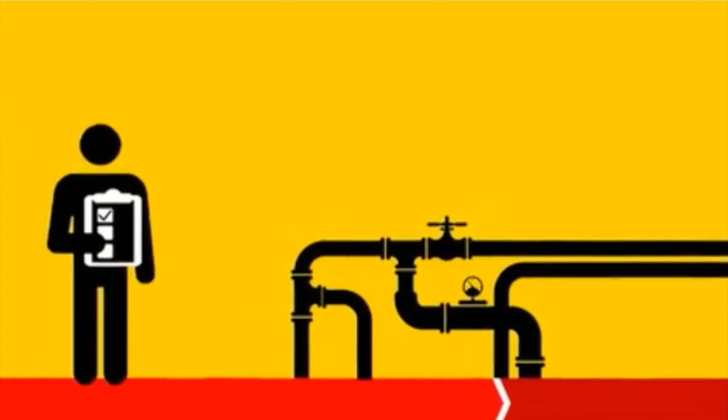Most people think process safety is about following a process, like rules and procedures to keep you safe. That's a part of it, but not all of it. So what is process safety? Process safety is about using special precautions to keep our facilities safe and our products in the pipes. In the process safety world, we call these special precautions barriers.

We interface with barriers every day as we work to keep our people safe. Let's take driving, for example. Think about rumble strips that have been designed into the roadway to help you keep your car in the lane, seat belts to keep you secured in the car, and vehicle maintenance to keep things running smoothly. These are all barriers working together to keep you safe on the road.

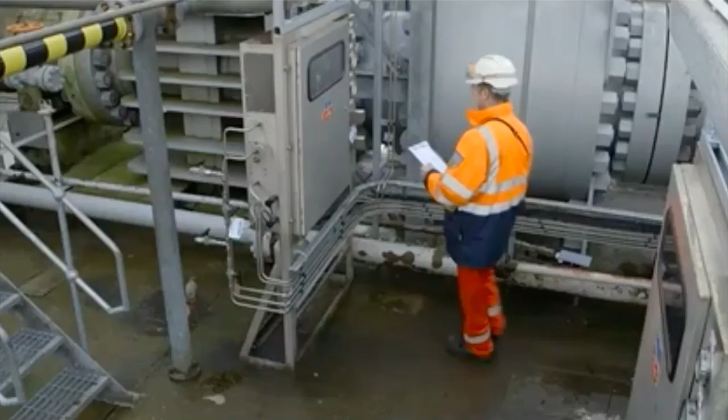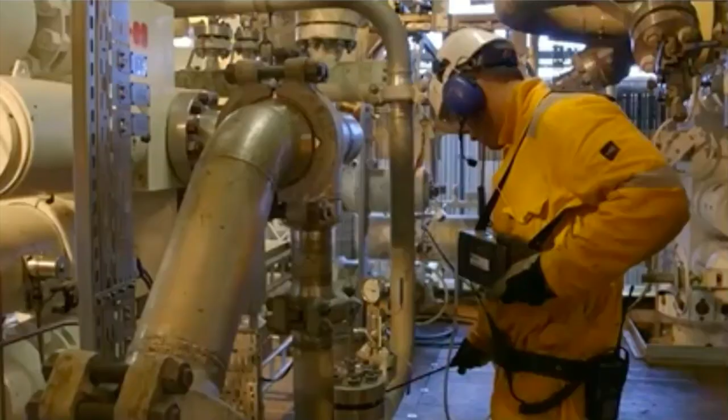We also use barriers in the process safety world to help protect people and the environment. These barriers can be equipment, people, or process related, and the bigger the potential hazard, the more barriers we put in place. In our operations, we're working with hydrocarbons, which can present serious risks. Our job is to ensure that we not only have a good number of barriers in place, but also that they are as effective as possible.

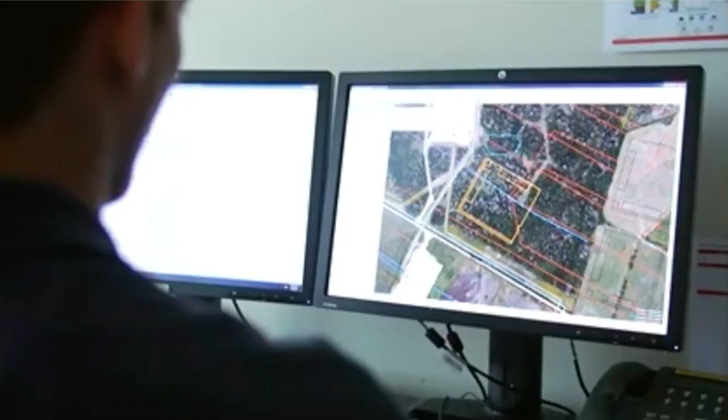We're doing our part to strengthen these barriers. Engineers are designing safer systems. Our operations personnel are effectively performing maintenance. Supervisors are stressing the importance of following procedures. And process safety experts are analyzing events and making sure that we learn from near misses. It's all about making our barriers as strong as possible.

So what can you do to strengthen the barriers that you control? Talk to your supervisor or join the Global Process Safety Excellence NOE and help us keep it in the pipe, because process safety matters.

So what's the difference between process safety and personal safety? Now, we're going to get into this bow tie method in a few more slides, but I want to explain it a little bit now just to give you an overview. So personal safety is the left-hand side of the bow tie, and you're quite familiar with that. You're always trying to identify the hazards, put in the barriers or controls to stop the accident from actually happening.

Okay, so personal safety we do very, very well as an industry. We're always wearing our helmets, safety shoes, boiler suits, ear defenders, goggles, gloves, you name it. There's not many times you'll find people going out on deck or in the engine room or in a refinery without wearing their PPE, because we're always trying to prevent the accident from happening. And that's what personal safety is about.

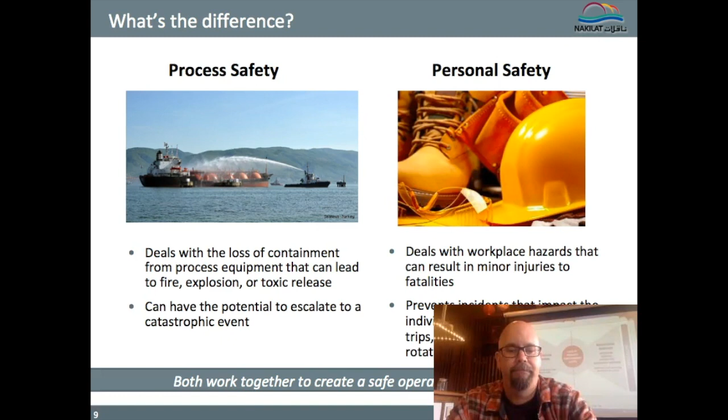So why is process safety so important? All right. So I'll use my bow tie as an example. On this side of the bow tie, we're all talking about personal safety and stopping the event from happening. So all our defenses and barriers are in place. Okay. And it's not just about doing a job, because when you think of personal safety, people think of a specific job.

Okay. So process is about the bigger picture. It's your open reporting, your housekeeping. It's everything we've discussed over the past 5 or 6 chapters. So how you run your installation, whether it's an oil rig, ship, or even your office, okay? All the processes that you do, okay?

And when you're planning for a job or navigating or refining a product or loading a cargo, you can plan for that. And this side of the bow tie, you can take a lot of time to make sure it doesn't happen, okay? Make sure you don't lose control, okay? Here on the other side, when you do lose control, when you have that leak and the leak comes in contact with a hot surface, then bam, this side of the bow tie escalates like that. It usually comes into an explosion.

You know, Exxon Valdez hits a rock, bam, there's oil going everywhere. I'll use here in the bottom right-hand corner the Macondo for those of you for more recent. You know, the good old Deepwater Horizon down the Gulf of Mexico. Bam, it just happens, and then all of a sudden it is the biggest catastrophe, $20 billion. Oh my gosh, you know.

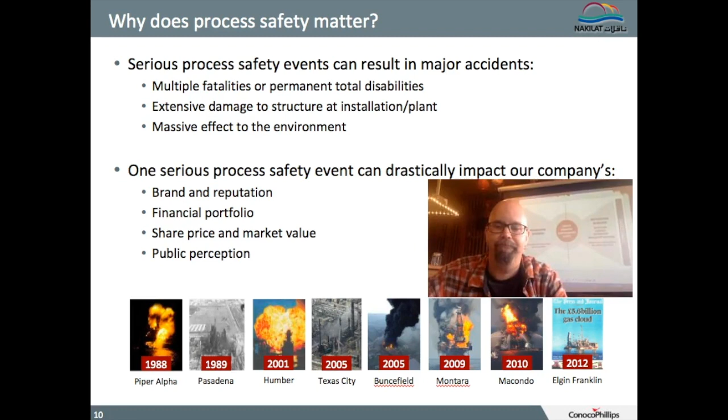All right, so that's why I have it in this particular section now. So it hopefully will bring everything that we have done together into really one little picture, and then we'll discuss it throughout this lecture. So these are some process safety events that happened in my company recently, and I want to talk to you about them because they're very good examples of different parts of process safety, which I want to touch on later on. All right, my first one up here is a vessel.

We had a loaded tanker at Fujairah Anchorage, which is just outside the Persian Gulf, if you're not familiar with it, at anchor, fully loaded. And she was at anchor, and this was her along here. Another vessel was coming down this way, and then out of the blue, for whatever reason, the other ship decided to do a 90-degree turn and wham, and T-boned this vessel. Bulbous bow, as you can see, has gone through the side of the ship and a little bit of damage near the top.

Okay. I was actually talking to one of the crew members who were on the starboard midship crane at the time. They were loading stores when this vessel was coming along, and poof, out of the blue, turned starboard, banged into us. Funnily enough, then, the ship pulled out of us, left a hole there, went down a little further, banged into another ship, went down a little further and banged into another ship, and then eventually came to anchor and stopped. Okay, and from what I understand, that captain is no longer allowed in the UAE territorial waters anymore. Anyway, that's not the point.

The point is, this is a liquefied natural gas carrier full of methane, and if you can imagine the cargo tank inside, and this is your water ballast tank, when the other vessel hit us, it went through the water ballast tank and stopped approximately 5 inches from the cargo tank. Okay, if you can imagine, LNG, if you're not familiar with it, is carried at minus 162 degrees Celsius, and a loss of primary containment there allows a freezing cold liquid to come out. It'll come in contact with mild steel. Everything will brittle and fracture, and also then release of the hydrocarbon itself. Explosion, catastrophic event. You get the picture.

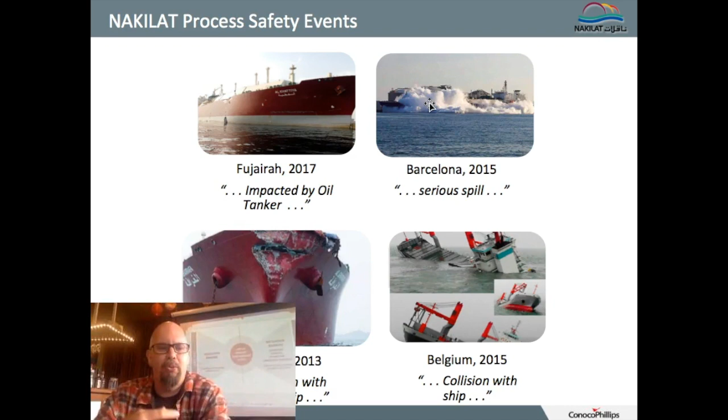So my problem in the past, when I've been teaching process safety, you always talk about these big catastrophic events that infrequently happen. They don't happen very often. Knock on wood, thank God, eh? So when I'm delivering that to crew members or even officers, they're like, man, what does this have to do with me? That's some big event that's not really my day-to-day thing.

I'm always concerned about my guys getting hurt. I'm always concerned about personal protective equipment, preventing accidents from happening, open reporting, making sure my risk assessments are good, my plant isolation is well established, my permits are in order, because those are the accidents that happen quite frequently, okay? And because of that, we as an industry put a huge amount of emphasis on personal safety because it happens quite frequently, and all those little small cuts, nicks, burns, bumps, you name it, okay?

And process safety has always been pitched at this high level, catastrophic event, and trying to make it relevant to my crew, I found always quite difficult, okay? They kind of understand it, but really they're like, man, that's just something I'm going to forget as soon as you leave the room, Dave.

So when I took this course in October from ConocoPhillips, they pitched it at a level where it shows everyone how they contribute to the process, okay? And even though the process itself doesn't fail very often because there's so many barriers and controls in place, one barrier can fail, two barriers can fail, but eventually it will get caught by a barrier before the loss of containment or the top event happens and it all turns to shit, okay?

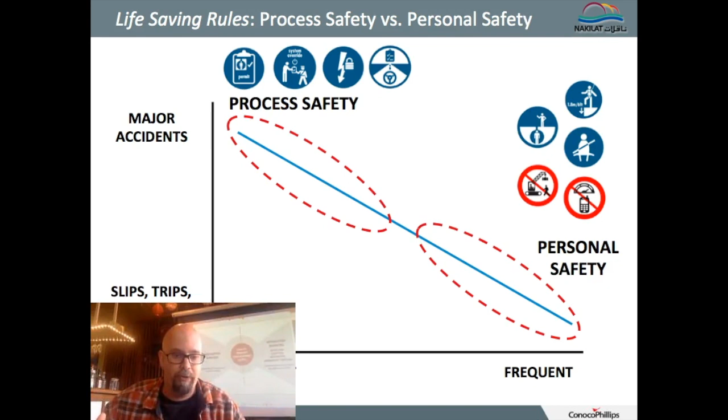So I'm hoping to, in my next couple of slides, show you how you pitch process safety to your guys, that it's not just some big infrequent event that happens every now and then and there's nothing you can do about it. This is showing you how you contribute to process safety, whether you're an oiler, a messman, the captain, third engineer, all these things pertain to you, and these are the things that stop the catastrophic events and the consequences from getting worse and worse and worse, okay? So here we go with a few examples.

So when I'm on board delivering these lectures, these are my 4 exercises that I use, and I break up the teams into 4 small teams. I don't have that luxury here online, so I'm only going to discuss the flange installation and torquing. The reason I use that more so for online is because really it's just a nut and bolt type of job, and everyone in my class, no matter what your level of education or experience, should have a rough idea of how to undo a few nuts and bolts and inspect inside this pipe.

Okay. In my scenario, though, this pipe is a hydrocarbon line, so there's hydrocarbons inside of it. I always tell everyone it's a bunker line, a heated bunker line. So there is bunkers inside, fuel oil. I wouldn't say it's boiling or anything like that, but it's hot. If it comes in contact with your skin, it'll give you a little bit of a fright. So now we want to take that flange off and inspect it. And I'm going to use the bow tie method to explain to you that job and how the process of doing it is so important.

Okay, so one, I want to teach you how to use the bow tie method, which is obviously the key objective here. But two, when you take this and start spreading the word and explaining it to your crew or your office, I'm trying to show you how all your crew or all your staff are a piece of the puzzle of process safety, and it is not just some big catastrophic event that only management are concerned about. I want to show you how you fit into the puzzle, or your crew fit into the puzzle. So here we go, bow tie method. Let's get started.

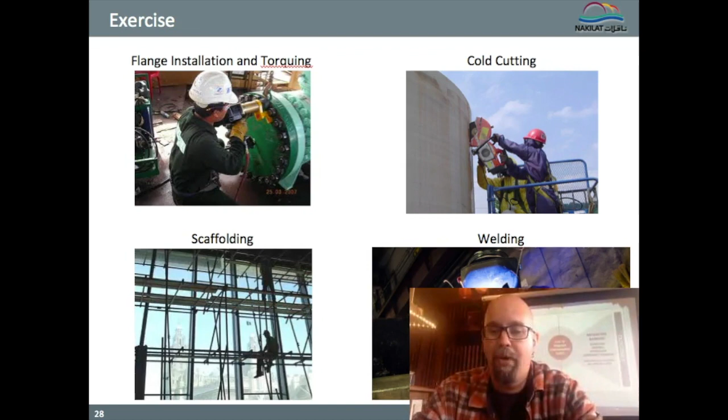So this is our bow tie diagram, and it's called a bow tie diagram because of its shape. It looks like a bow tie, easy peasy. So when I teach, especially the left-hand side of the bow tie diagram, I usually teach it like a risk assessment, and that's not 100% accurate, okay? Because a risk assessment is for a specific job, and process safety is about the process of doing your job. So how can I explain it? I will try to clarify as I'm going along.

So when you're doing a bow tie for, let's say, this particular job, taking the flange off and putting it back on, inspecting the pipe inside, all that good stuff, there are some hazards associated with that job. And if I gave you 10 minutes in a group of 5 or 6 people and told you to identify the hazards, I'm sure you'd come up with a fairly extensive list.

Okay, and same thing here. We talked about it in whatever chapter it was, about getting your experts involved, brainstorming ideas of all the hazards involved. So in this particular job of replacing the flange, some of the hazards might be the weight of the actual flange itself, pressure in the line, the hot liquid. We said the bunker line was heated. Access to the actual site might be a problem. Pinch points when you're reattaching the flange or swinging the flange around.

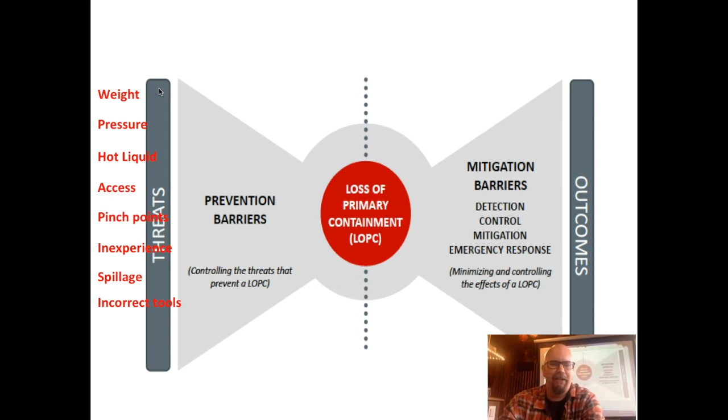Inexperience is a hazard, for sure. Spillage: once you do crack that line, no matter how much you've drained it, you're still going to get some semblance of a leak. Incorrect tools, making sure you have the proper tools, your finger savers, 10-pound maul. You can never go wrong with a 10-pound maul when you're opening up a flange, and proper tools and stuff like that. The incorrect gasket and corrosion itself.

Okay, these are all the hazards, and I could keep on going, and stuff like that. But I'm just using these to show you how the system works. So like any risk assessment, you sit down as a group of people, brainstorm your hazards, and put them all down. And that's what we've done here now. So now in the Swiss cheese model, you want to put barriers or controls in place to prevent those hazards from turning into an accident or an incident. And here they call it the top event.

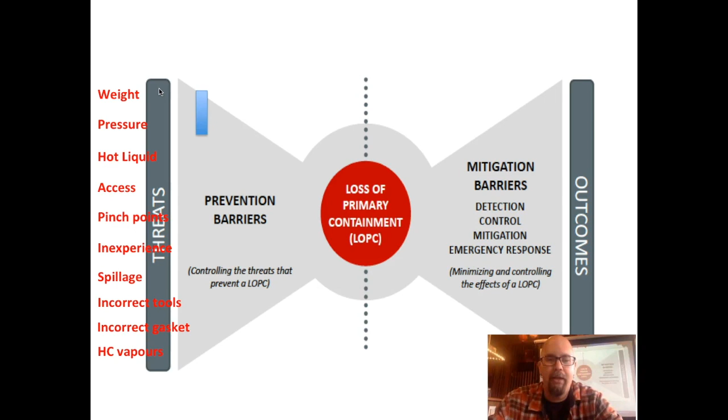And some of the barriers we might talk about might be a chain hoist to help you lift the weight of the flange. Things you might be looking for are making sure you're using proper strops, hanging off points are safe working load tested, chain hoist is in good working order, things like that. Next is the good old permit to work system. You can't go wrong with the good old permit to work.

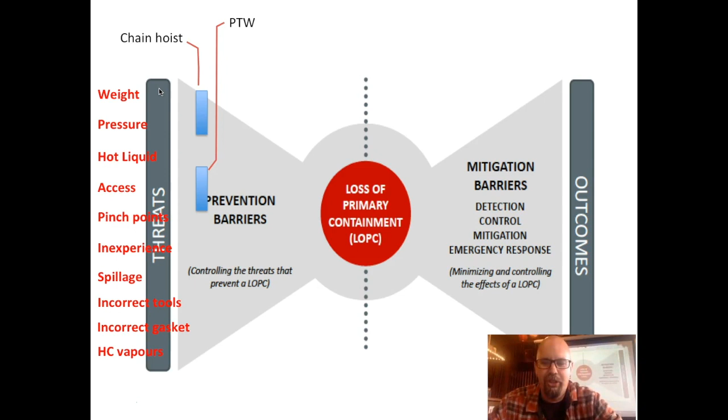It's not the piece of paper that makes you safe, let us be clear, but it's all the instructions on the permit to make sure you have them all done before you go for signatures. So that might involve draining down the system, locking it out, making sure people understand what's going on. Anyway, we won't get into that. We've already talked about permit to work.

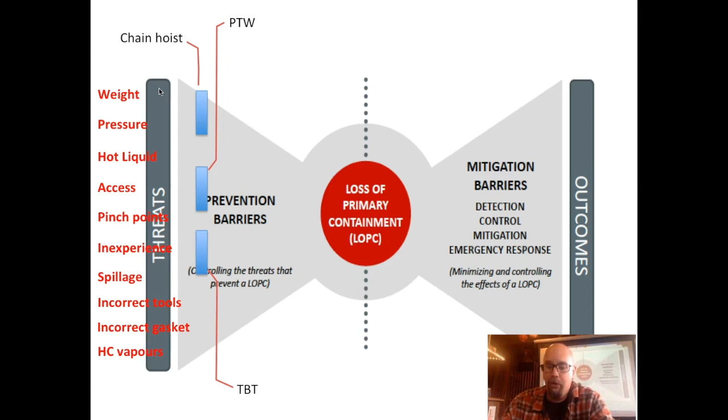Next is the toolbox talk. When I travel around, we focus so much on the toolbox talk because this is where everything comes together. This is where you've planned your job, you've assigned your people, your permit to work should be almost at the verge of being completed. Your plant isolation has already been discussed, your tools, your equipment, how you're going to do the job. I cannot stress to you enough: good communication and participation in your toolbox talk to get yourselves all organized is a really solid barrier.

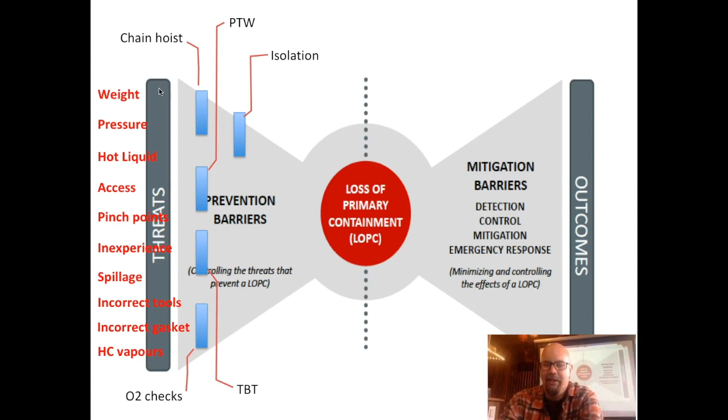Next are your O2 checks, for hydrocarbon vapors or toxic gases, whatever's involved. Next is isolation. You're not just going to open up that flange when it's under pressure. So draining it down properly, locking out your valve so nothing comes in after the fact when you open it up. All your isolations will tie in as well with your permit to work, as you can imagine.

Next is proper tools. You're not going to use any homemade improvised tools, stuff like that. You want to have your proper torquing wrenches and all that good stuff, and in good working order as well. You know, cracked off handles, and anyway, we won't get into that. But make sure you're using the proper tools.

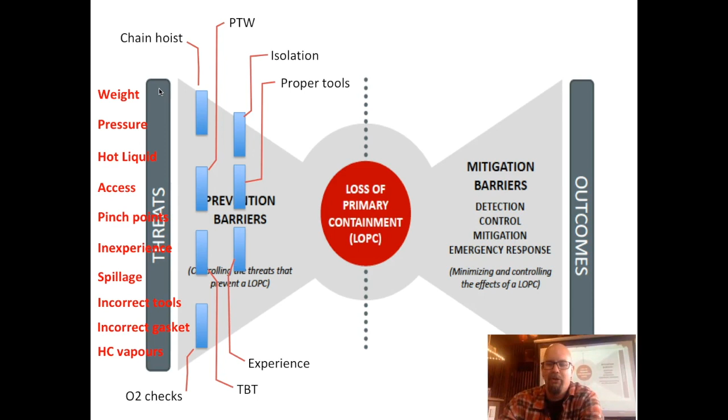Experience. I cannot stress to you enough. When I talk about risk assessment, I always talk about the most inexperienced person on board your ship being assigned a task with base PPE: helmet, boiler suit, safety shoes, goggles, and gloves. So when we talk about PPE for a certain job, you're always talking about PPE above and beyond the basics, which is your helmet, boiler suit, safety shoes, and a pair of gloves and goggles.

So same thing here for experience. Your most inexperienced person on board, if I assign them to do this job, of course they're going to get hurt. So when we talk about experience, we want someone who's done this job before, or a supervisor, whatever it is. Okay.

Next is the gasket itself, making sure you put the gasket in between the two flanges so that it doesn't get further leaks. So this is where process safety is more than just a risk assessment. It is how your process is done, and the process of replacing or changing this flange is that the proper gasket is used after the fact, tightening up your flange properly after the fact, all these things. So it's not just the good old hammering open the bolts and opening it up and making sure it's isolated. It's the whole thing of putting it all back together, and I'm going to show you how that comes together in just a few minutes.

Next, when you crack open the flange, you're going to get some form of liquid come out, no matter how much you've drained down. That liquid, if it fell on the floor, could become a slippery surface and create another hazard in itself. So a drip tray to catch all the drippings or drainage at the flange itself when you crack it open. And of course, tools.

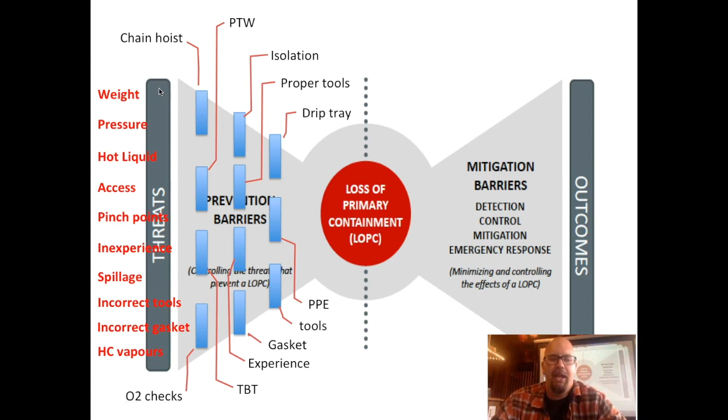And last but not least, defense is always PPE. And really, you should not need PPE if all these other things are done. Like I said, in the hierarchy of controls, the last level of defense is the PPE. So you may want to have a face guard when you're cracking open the flange, maybe some type of impact gloves for when you're using the hammer and the spanner to open up your things. Maybe impact gloves when you're putting the flange back on. And it could be anything. So please keep that in mind, that PPE is the last line of defense.

So if I go through all these barriers or controls and they're all in place, 99.9% of the time, you are not going to have an accident. You've had a good solid toolbox talk, your permit to work, your plant isolation's in place, you have experienced people, proper tools, good PPE, O2 checks for all these different things, and you're lifting it using a chain hoist. It's a really solid, well-planned job.

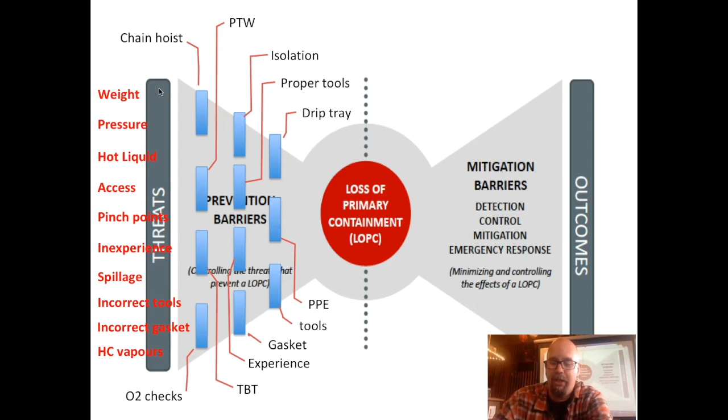But in my example for process safety now, let us say that we had a relatively inexperienced person, and he installed the wrong gasket. No one got hurt. You didn't lose primary containment at the time. You've put the flange back on. You've pressure tested it. There's no leaks. Everything works as it should. But you have put in the wrong gasket, and maybe not today, maybe not tomorrow, maybe next week, you start to get a little bit of a drip. And this is what we're going to be talking about now when we talk about process safety. So I'm going to pause right here and move on to my next set of slides for this.

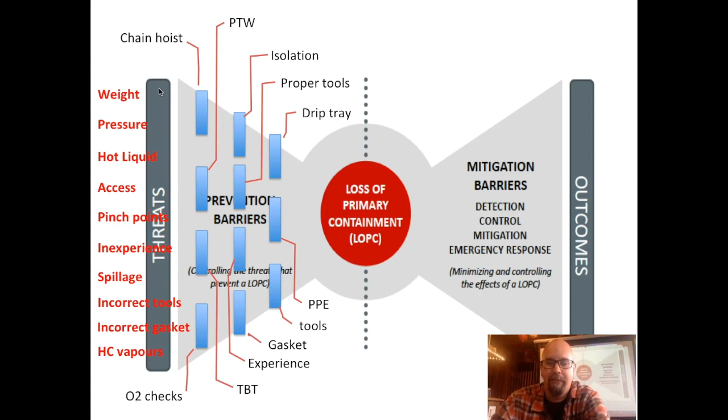So now we're on the right-hand side of the bow tie, and this is about the mitigation barriers. What I mean by that is, on this side we talk about all the hazards to stop the one single event from happening. But if it does happen, this is where process safety and risk assessment are a little bit different. In risk assessment, you're always talking about just stopping the event from happening. But in process safety, what if it does happen? You lose that primary containment, and then how does that get bigger and bigger until the consequences get more severe.

So we talked about the wrong type of gasket being put in, and an inexperienced person doing it. The job itself, no one got hurt. There was no leakage during the pressure test of the line. Everything's working well. And like I said, the leak hasn't started today. It might not start tomorrow, but in a week or two, or maybe even in 6 months from now, the gasket deteriorates and you start to get a small leak. That's all it is, just a drip.

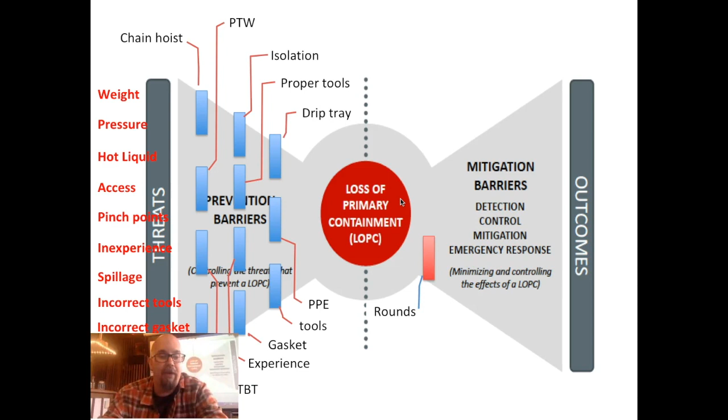Now, what are the first things that we have on board to detect that leak? Just think about that for a second. Most people go with leak detection and stuff like that, but your first thing is rounds. Whether you're working cargo, doing your deck rounds, or your duty engineer doing rounds of your engine room, going around looking for those leaks.

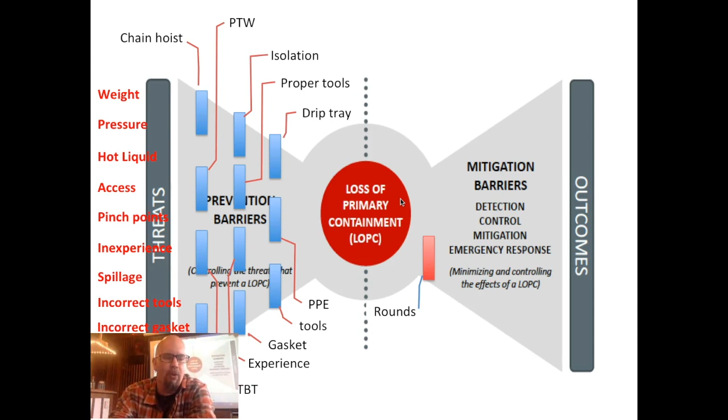So when I'm at a daily work plan meeting and all the open reporting is coming in, and another one is also open reporting. And all these small things that people are putting in as hazards, okay, leaks, poor housekeeping, stuff like that. These are the essential first steps of finding things before they turn into something worse. Okay, that's why maintenance, good housekeeping, whatever you want to call it. Okay, if you have that, and with all that in your policies and procedures, that is the first step.

If you catch it at your rounds level or your open reporting where it's just a leak, then that's it. You've caught it. You've tightened up the flange. Maybe you don't understand why the leak is still there. You might take it all apart again, open it up, find out the gasket is the wrong type, put in the proper type of gasket, seal it up, and it never ever becomes an incident.

Okay, so when we talk about open reporting, I know in chapter 2 or 3 I was talking about it. So important. If you got 20 or 30 guys on a ship, and you got 30 guys looking for things that are going wrong on your ship or your installation, whatever you want to call it, and you catch it at this stage, then poof, it never ever becomes this catastrophic event.

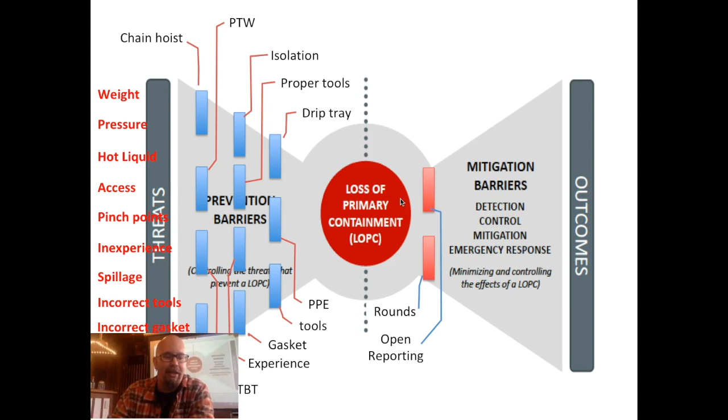Okay, so let's say you got people who don't really give a shit. They see the leak, they just assume that you're in an engine room, of course it's going to leak. They just accept it because the standards are so low. Okay, same with open reporting. They walk by, it's like, that's not safety, that's just housekeeping. Everything leaks here. That's how it goes.

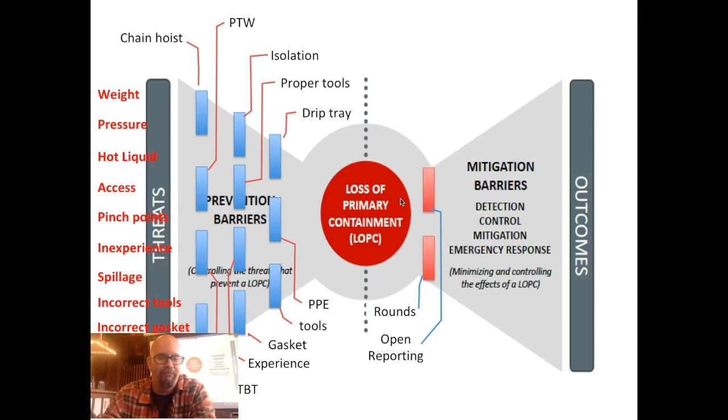So now let's say all of a sudden your flange, your gasket deteriorates even more, and in the middle of the night your leak turns into a spray and it starts to pour liquid into the bilges of your ship. What types of detection do you have? Okay, the next is your bilge alarms. If your float comes up, you got hydrocarbons pouring into your bilges. That bilge alarm goes off in the middle of the night. Someone comes down and investigates, and they find the leak.

Okay, but I talk to the machinists and stuff like that. Every Saturday or whatever weekend test you do, you run down and test the bilge alarms. And some guys are like, man, why am I testing this every freaking week? And then they start cutting corners, or they jury rig the stuff so they don't have to test it, and they still get their noises. We won't get into that. That's just bad practice. I'm not teaching you that. Okay, but the alarms themselves are the first level of finding things before they go wrong.

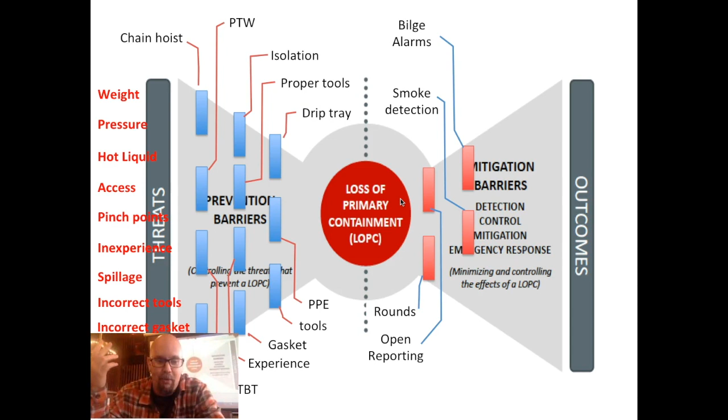Okay. Same thing. Let's say my leak has turned into a spray. It hits onto a small hot pipe. It starts to smolder. Smoke detection picks it up and sets it off. Someone goes down and checks, and they catch it before it turns into a fire. And then automatic systems. Sometimes you'll have heads that see flame, the flame detectors. As soon as a small smoke turns into flame and it hasn't been caught, poof. Automatic systems. It sounds off the alarm, shuts in dampers and stuff like that.

But if you're not doing your PMs, your automatic fire dampers are seized. You're not doing your maintenance for that. Your smoke detection, you're not regularly checking it. It's not detecting properly. You're not testing your bilge alarms. All these things. And at 2 o'clock in the morning, all of a sudden you have oil pouring out of this gasket. It's hit a hot pipe. It's turned into a fire. Your gas heads and your smoke heads are not working. Now that small fire has turned into something rather raging.

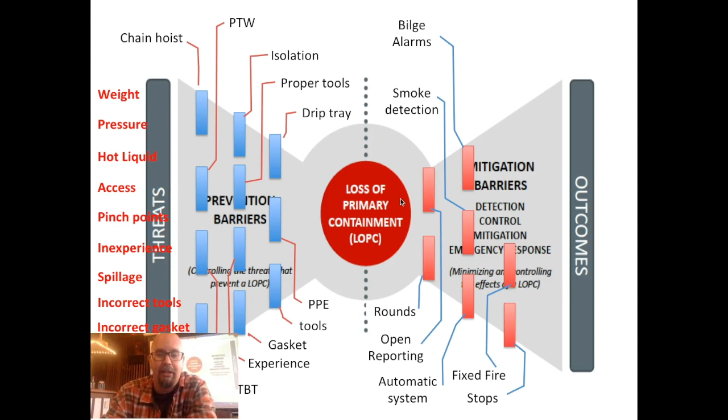Okay? What's your next level to prevent it from getting worse and worse and worse? And as you can see, the bow tie is getting bigger and bigger. Okay? So the next level of defenses you have are your stops, your fuel stops and stuff like that. Your fixed firefighting system, depending on how big this fire has gotten.

Procedures for shutting in and isolating equipment. All right? And possibly assistance from outside. You might need to get tugs. You might need to get fire capabilities. You might have lost the engine. You might be drifting. There's all kinds of different scenarios here.

Okay? But you don't catch the fire in the middle of the night. People are not experienced. Your fire flaps, you haven't done your PMs on them, they're not working. Your fire detection system, you were getting alarms, so you've isolated it, you blocked alarms or whatever it is, and you're not familiar with the procedures. And now all of a sudden this fire is starting to really rage, and you're going to lose your engine room.

Okay? Once you start losing your engine room, then you've got to get people in there fighting fire. All your drills, your practices, your SCBA, your breathing apparatuses, all your hose handling drills, that comes into force right now, okay? You're trying to get in there and fight that fire. But if you're not doing drills properly, same thing, every defense has problems with it. That turns out to be an absolute mess, okay?

Next stage, you've lost the engine room, and all of a sudden you've got to abandon your ship. It was the best lifeboat in the whole wide world until you have a fire, and now you have to abandon ship. Your lifeboat drills, all that kind of stuff. You're thinking, oh my God, it's Saturday again. Why am I testing the engine? I just tested this last week. Why do I have to swing this boat out every week? Because of the right-hand side of the bow tie, once it happens like that.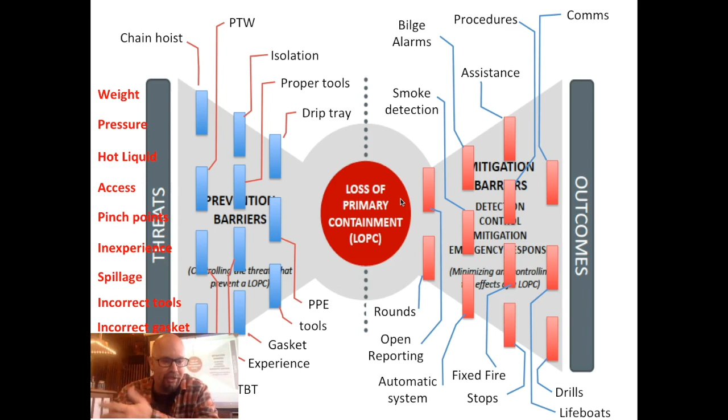Okay? On the left-hand side, you could plan to replace this gasket and flange for hours, maybe even days, depending on how complex it is. You have tons of time on the left-hand side of the bow tie, but as soon as you start losing that primary containment, and poof, it starts to leak, then it hits a pipe, then it turns into a fire. You haven't got a defense in place. The fire gets bigger. Bam, bam, bam, and all of a sudden you're going to lifeboats. Other things to think of are communication, how to send off distress messages, EPIRBs. And when your boat sinks, it escalates very, very quickly.

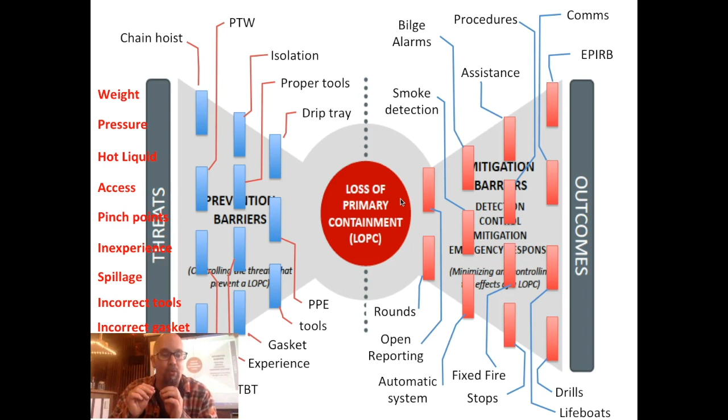So when we're talking about the process, this is where I try to show the machinists, the ABs, where they fit in place, doing their rounds, open reporting. If we get that part right alone, then it never escalates past just being a leak. Does that make sense? Fixing all your things, making sure your smoke heads work, testing all your stuff, checking your lifeboats, and so on. These have to be working 100% all the time, because if God forbid something does happen, you don't get a chance to think about putting a motor on your fast rescue boat. It should be ready to go now.

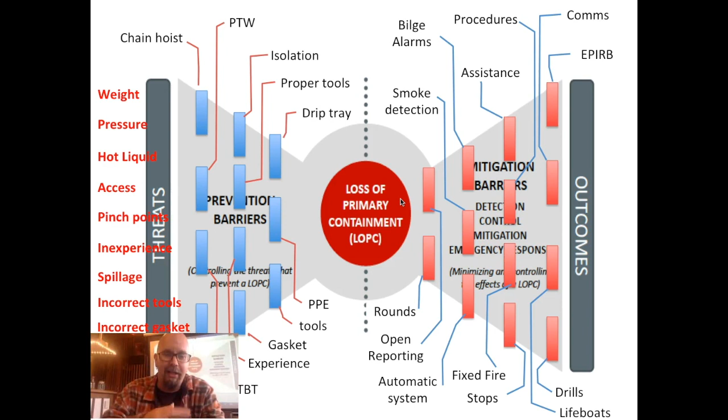Same with your gas heads. Press the button, your vent flaps shut. Close your doors, press the button, the CO2 is released. Everything should work, because if it doesn't, it escalates very, very quickly. And this is the bow tie method. All right. So that's my description of the bow tie method.

And I'm aware that I teach the left-hand side of the bow tie kind of like a risk assessment, and I probably shouldn't. Because the risk assessment, like any other barrier, your PPE, your toolbox talk, your permit to work system, is part of the process safety. And I teach it because we talk about brainstorming your hazards, putting your barriers in place, which is very similar to the risk assessment. But it is in a bigger scheme of things.

That's why I demonstrate the gasket. In a risk assessment, you don't put the gasket in, because that is a process. It is good housekeeping, good seamanship, good engineering practice to make sure the proper gasket is in. So in my next couple of slides, I review a few things to show you the difference between personal safety and understanding that the left-hand side of the bow tie is not a risk assessment.

It is all the barriers which are part of your process, okay? So when I talk about the flange installation and torquing here, the body in the line of fire, okay, if you're going to crack open that flange, your body position. You don't want to be standing perpendicular to it, so if anything comes out of the flange, it hits you. You want to be standing out of the line of fire.

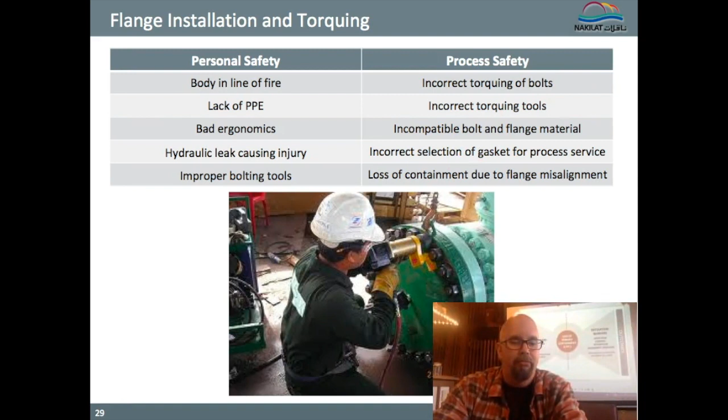All right, so I'm going to skip over the cutting and grinding, cold cutting. It's very, very similar to the welding example I'm going to give now in just a few moments. I'm going to look at scaffolding here. And when I deliver this to people, I'm usually delivering it to mostly seafarers, okay?

And one, I want them to understand how important they are and how well trained they are as well when I'm giving this lecture, because it is. Part of my job is to build teams on board and stuff like that. Okay, so they are a paid mariner. So a seafarer these days, they are a jack of all trades, master of none.

They can be in the engine room overhauling engines, lifting operations, loading cargo, security watch on the gangway, navigation. You name it. Welding, fabrication, you name it. We are a well-rounded bunch of people, okay? And with that, we understand the hazards of different types of jobs because we do many different types of jobs, okay?

When you go into dry dock, though, you have usually a very, very well-defined skill set. Someone is a scaffolder, a welder, or a grinder, or a pipe fitter, okay? And if I go in and tell some guy to rig up scaffolding, sure, they know how to do it very well, poof, they will erect a scaffolding, okay? But do they have the understanding of other things, simultaneous operations that are going around or hazards around them that this scaffolding rig up is going to affect, okay?

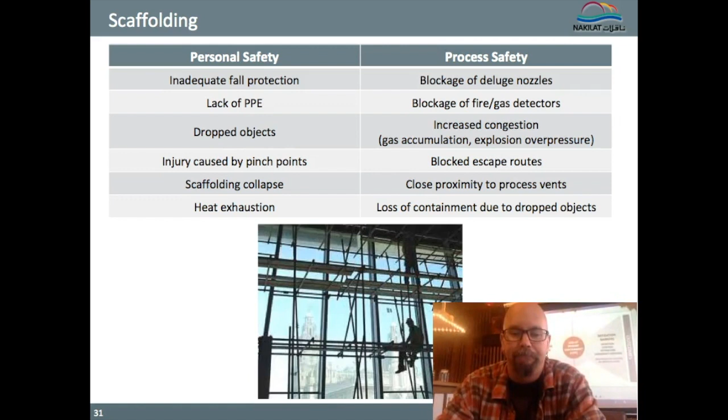Lack of PPE. I had a buddy of mine, chief engineer, just two doors down from me. He was in charge of building 3 oil rigs in China in a dry dock. And we talk about lack of PPE. So welders in that particular dry dock were not issued welder's goggles. Okay, they all welded naked eye until their eyes failed, because there's another 250,000 welders in line for the job. Okay, cheaper to get new welders than pay for the actual glasses.

All right, it's a horrible story. I shouldn't even laugh. But his job was to not let anyone die during his month on board, month on, month off. And if no one died during his month on, you got a bonus. Okay. It was crazy. So things like I said, things falling from height, all those things we talk about, because we do that quite well when we talk about personal safety. We know the intrinsic hazards of welding.

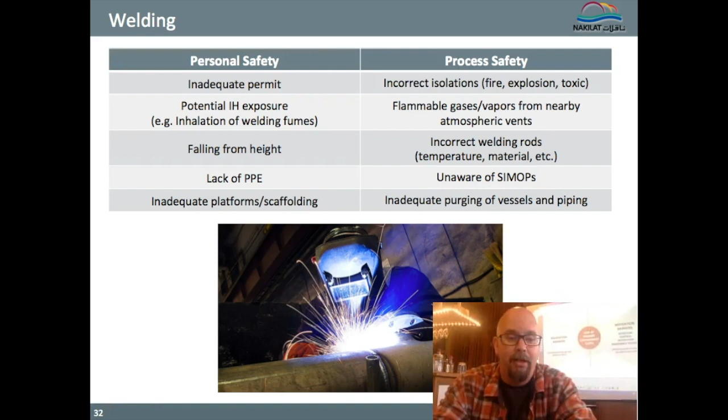But if down the line your isolation is passing or completely fails, or someone removes it, God forbid, and repressurizes the system while you're there, you think the hazard is not there, and then bam, all of a sudden it is there and you get injured. So please keep in mind, I use weather as an example of hazards that come and go.

You might be working aloft, it's a nice sunny day, all of a sudden the ship changes course, shifts the wind, and now it's blowing a hoolie. The wind is the hazard. So all morning you've been chipping away, happy as a lark, and then the vessel changes course, and the hazard you considered in the morning, when you were so comfortable up there, just changes like that. So please keep in mind that hazards in a particular job may appear, may disappear, and they're constantly moving.

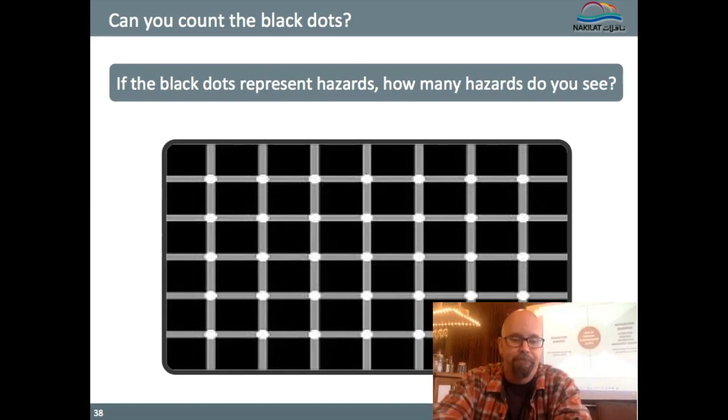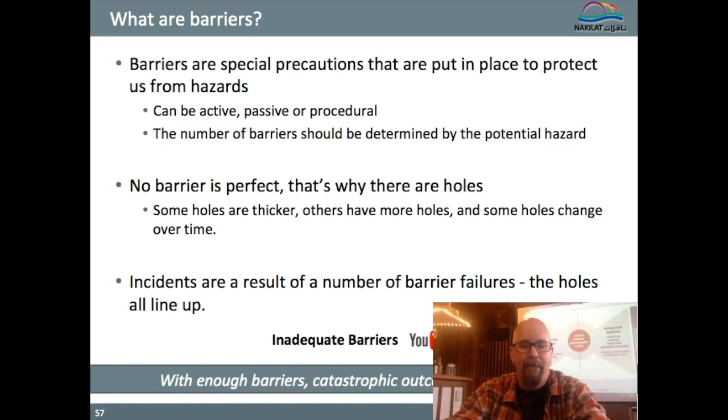So this is my second last slide here, guys. We're talking about barriers, and I know I've touched on barriers quite a bit. Barriers are controls, and I don't want to beat it to death, but there are three different types: active, passive, and procedural. I'm going to discuss those in my next slide. And there's another diagram to explain the Swiss cheese model and how it all works. Please keep in mind that no barrier itself is perfect, and therefore we try to put as many barriers in place as possible to prevent an accident from happening.

Okay, gang, this is my last slide for process safety. Before this lecture started, we used to talk about the Swiss cheese model, and really it represents the left-hand side of the bow tie model. And we always talked about the threats, and we always talked about trying to stop the event from happening. All right, risk assessments, barriers of control, Swiss cheese model, always having our barriers in place to stop the accident from happening.

Okay, so in our changing the gasket scenario from this lecture, we had different barriers in place. We had toolbox talks, we had permit to work, we had plant isolation, and in our lecture here, we talked about the toolbox talk. And the toolbox talk, let's say in my example here, never talked about the proper material for the gasket, and it never talked about the inexperience. Let's give this guy a name. Let's call him Charlie. So the inexperience of Charlie when he's replacing this gasket and opening up the flange.

Okay, so that's fine. So one of the hazards got by in the toolbox talk, but the permit to work system caught it, and poof, it didn't become a problem. But like I said, the toolbox, the permit to work system, the lockout for life system didn't address the inexperience of Charlie, and it didn't address the gasket material. So because of that, we put the wrong material in. Now, because of all the barriers in place, we did not hurt Charlie, right? It went out very, very well.

We had policies, procedures. What else do we have in there? Chain blocking for lifting, all those different barriers, and no one got hurt. So from a simple Swiss cheese model and a specific job example, no one got hurt, and we would consider that a success. Okay, but we're not. Now we're looking at it as the entire process, and the entire process is of making sure the right material is in, the alignment of the pipe, so that it doesn't become a problem later on.